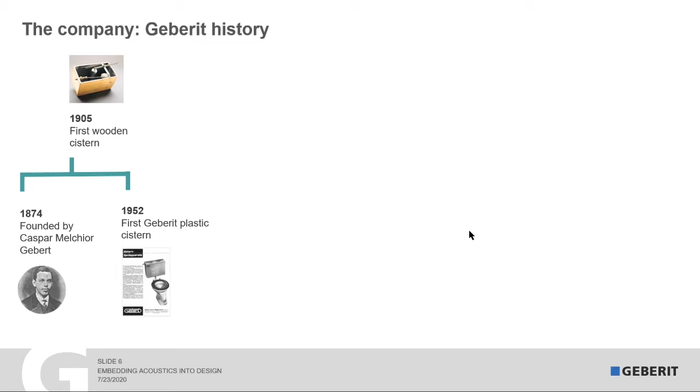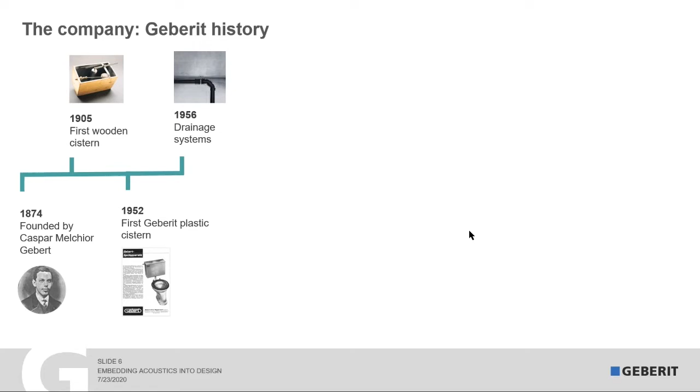Then a very important step in 1952 was when from wood it went to plastics, when plastics became the main material of Geberit, and cisterns have been produced with plastics. Then other product areas came into the picture, like in 1956 drainage solutions, then 1964 when the cistern solutions went into the wall. So the first concealed cistern is already more than 50 years old, from 1964.

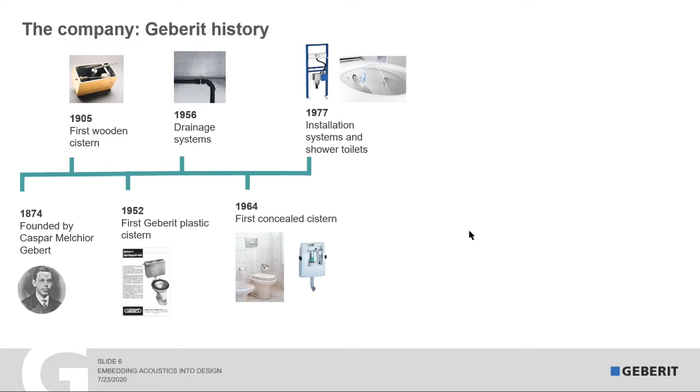Then everything, and this is something we will talk about today also a little bit, installation systems - not shower toilets, but installation systems. It will be a great contributor when it comes to acoustics when we talk about entire systems. We have water supply systems, and a specific water supply or supply system for industrial applications called Geberit Mapress. Most recently in 2015, Geberit did an acquisition and now also has products in front of the wall.

So basically, historically Geberit is very well known for its know-how behind the wall, and recently made the step out of the wall into the bathroom with bathroom ceramics.

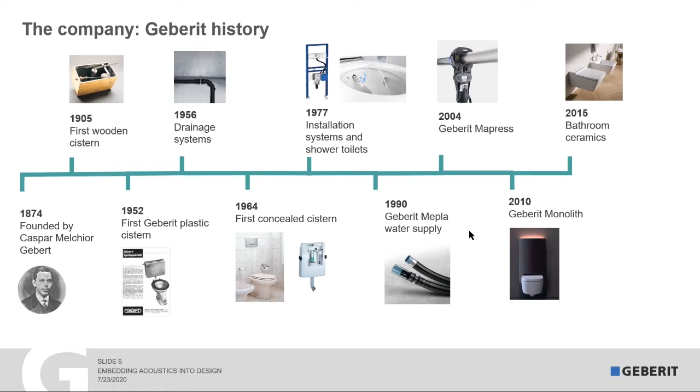We invest every year around 2.5% of our annual net sales into these different technology areas. In the first modules we have been talking about hydraulics and virtual engineering when we discussed drainage solutions or siphonic roof drainage systems, and today we're going to discuss more about sound insulation.

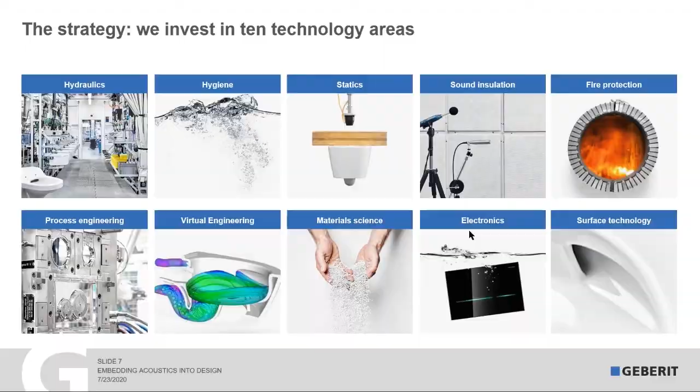When we talk about this technology area, it is important to know that Geberit has its own sound laboratory, which is unique in the industry. It's operational since 1997, and it's based next to our headquarters in Rapperswil, Switzerland.

Around 1,750 square meters, this sound lab is used to really test realistic sanitary installations and to measure the acoustics for different situations. So we are not only testing single products in this building, we really can set up complete installations over several floors and do testing accordingly.

So now let's discuss the main topic, which is noise today. So what is noise? Sound generally is seen as positive for primary use. For example, in cinemas, when we have conversations, when we're going to a concert, when we're listening to music, TV, etc. All this would be classed as positive sound to the people which are involved.

However, once the sound is escaping from the primary user's environment, it could be also classified as noise. For example, if in a household the TV is too loud and the sound escapes into the neighbor's living room, it could be classified as noise. So noise, if we talk about noise or sound, mainly we talk about unwanted sound.

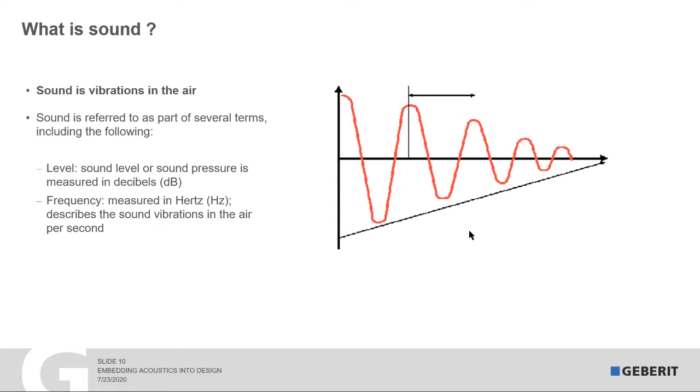In our context, it is usually described in two dimensions: first, sound as sound level or sound pressure, which is measured in decibel (dB), and also the frequency in hertz, which describes the sound vibrations in the air, or one cycle per second. So these are the two main parameters we use to describe sound or noise: decibel for sound pressure level, and hertz for frequency.

Now let's listen to the sound or frequency spectrum of different noise. This will be the next step. I'm already telling you what is coming next, but let's just have an ear on different hertz, on different frequencies we know.

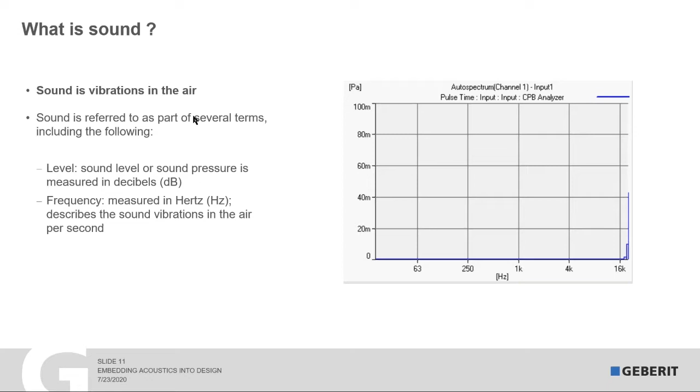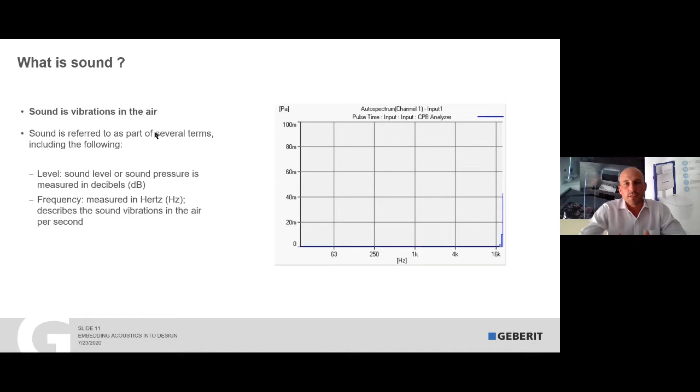So what we could see here on the graph, and also what you could hear, was the spectrum from 0 to 16 kilohertz on the same pressure level, and definitely it matters what kind of...

So we could list now the whole range of hertz which we as humans can hear, from 0 to 16 kilohertz. And in the second slide we could hear a bunch of different frequencies which come with a different sound.

What is the key here? We need to understand that every individual perceives or colorates different noise with his memories and his feelings. So when we talk about sound or noise, we need to consider psychoacoustics, which is a branch of psychophysics involving the scientific study of sound perception and audiology, and how humans perceive various sounds. At the end of the day, if we talk about acoustics in building design, psychoacoustics plays an important role, mainly in the individual assessment of unwanted noise.

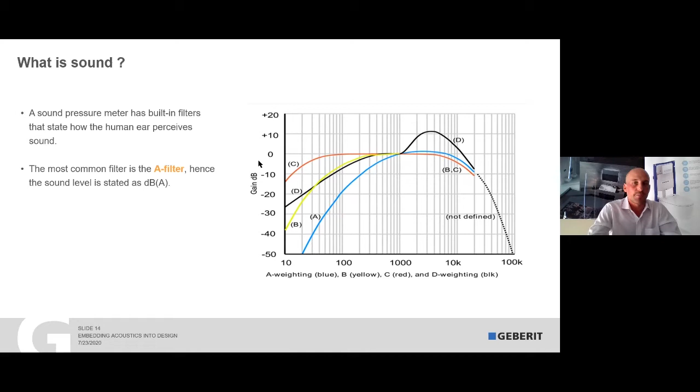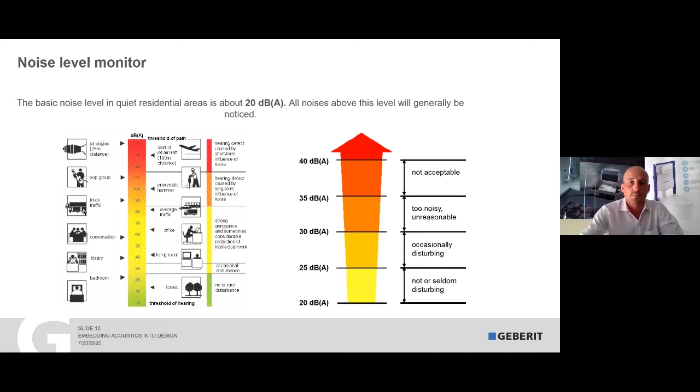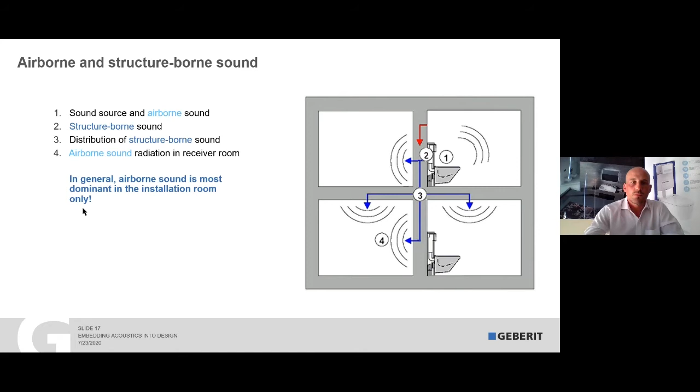I think that concludes this introduction about what is noise or what causes noise, and now why it is so important when we talk about acoustics in design.

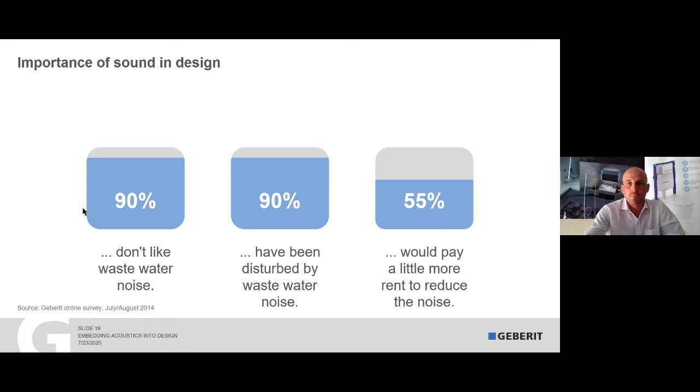But it really depends, and it depends on the volume of the sound, it depends really on the source and the type of the sound. Again, here the individual perception and the memories. And also it depends on what we associate with the sound we are hearing. So again, very relative.

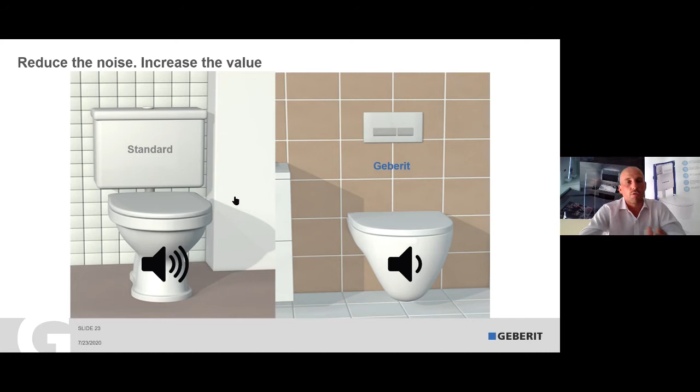So reduce the noise means also increase the value. It can definitely play an important role here, because flushing a toilet probably is not the most wanted noise we want to hear from our neighbors. So when it comes to Geberit, we can definitely give you some recommendations on what can be done to reduce the noise and to increase the value of the building, of the apartment, of the hotel room, whatsoever.

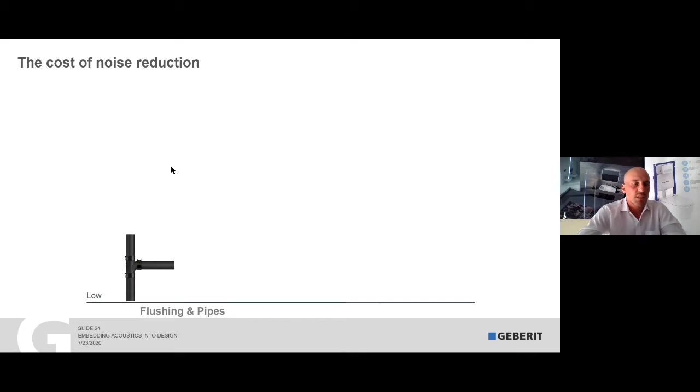If we have a look at the cost of noise reduction, I'm very brief. We can talk about materials, so using soundproof pipes and fittings, for example, or soundproof products. Let's say this is more of a moderate investment or a rather low investment. When we then talk about doors and windows, different quality, different type of glazing, the ceilings and so on, then the investment or the budget position will be

definitely on the higher side than when we talk only about pipes, for example. And then when it comes to really floors, walls, ceilings, the big surface within the buildings, then we talk of higher cost investments to reduce the noise.

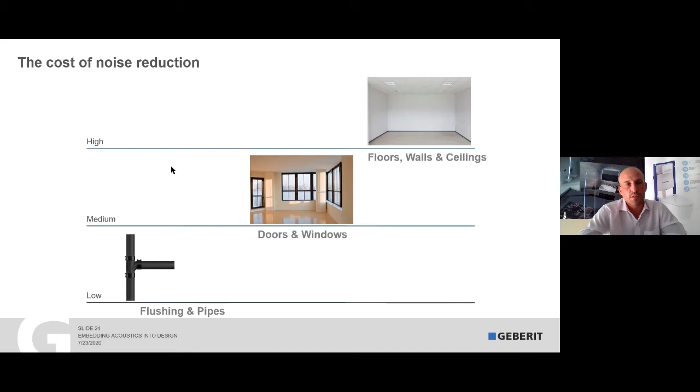But it's definitely essential to look into that topic from a holistic perspective. Just to replace a single pipe as our only measure against noise will not solve the general issue, because we will see later on that we really need to look into the complete build-up and the complete system which will be implemented in the building.

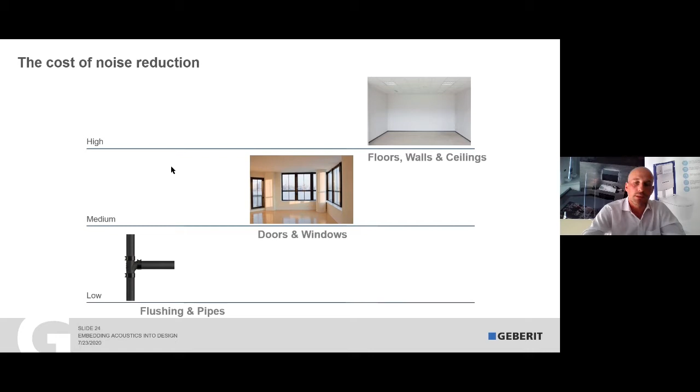And acoustic regulations, I think that's, from a Geberit perspective, the key or the most important fundament which needs to be in place to start talking about acoustics. If we don't have a clear standard, it will be difficult or impossible to classify or to measure and rate different noises.

So just a small study which I did, I found the green building regulation specifications, and now here when you talk about the UAE, we are referring to the British standard BS 8233 of 2014, which is a British standard document for guidance on sound insulation and noise reduction for buildings, but it's very vague regarding reducing sanitary noise in buildings, with the only reference being noise emission from hydraulic systems, including domestic hot and cold water services, refrigerant pipework, and soil and waste pipes serving other bedrooms is not to cause disturbance in normal use.

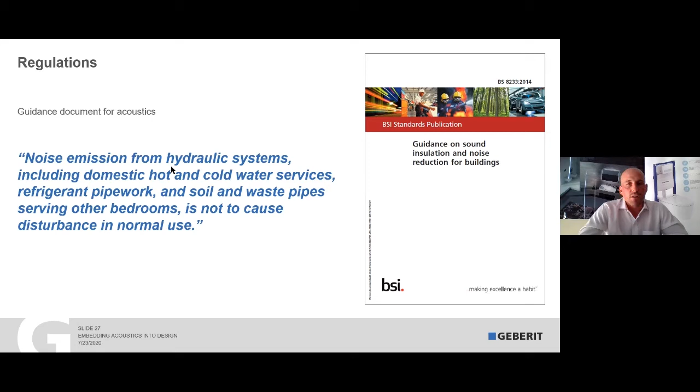So this kind of sentence is pretty vague. It's not really clear, and in general for steady external noise source, it is desirable that the internal ambient noise level does not exceed the guideline values in table 4. So there is a table. If you look at this table, it shows recommended noise levels for dwellings. The critical rooms have a suggested dB rating of 35 dB between 7 AM in the morning and 11 PM in the evening, with the bedroom having a recommended dB level of 30 dB between 11 PM and 7 AM.

Well, first of all, it's already good to define different areas within the building accordingly with their activity, to have different recommended noise levels. But when it comes to the terminology here, it's like desirable, recommended, and guidelines.

So meaning there are no requirements from this document to meet a relevant standard. It really would need to be clear what needs to be achieved, and then also what we need to look into. It needs to be defined how to measure.

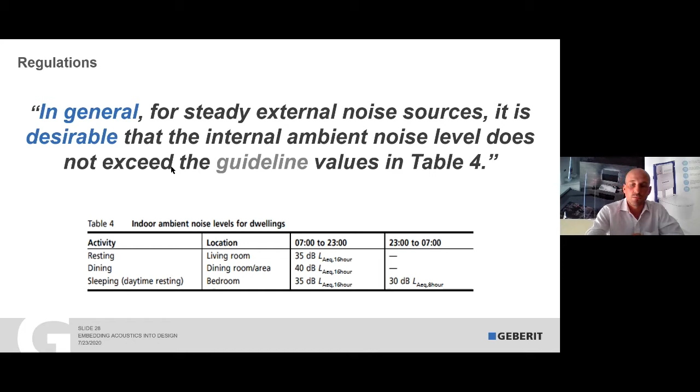So these guidelines are quite vague recommendations, and it goes further - there is building regulations Part E, which states that for soil stacks passing through noise sensitive rooms, bedrooms, lounges, wrapping with 25 mm of unfaced mineral wool within a plasterboard duct, 15 kg per square meter density, is deemed to be adequate. Again, this is very vague and gives no guidance on noise levels to work to, not to mention the use of any acoustically optimized products. It does not really describe how the acoustic regulations come across. So we need clear standards which are comprehensive, otherwise we do not know what to achieve and how to compare or classify in the end.

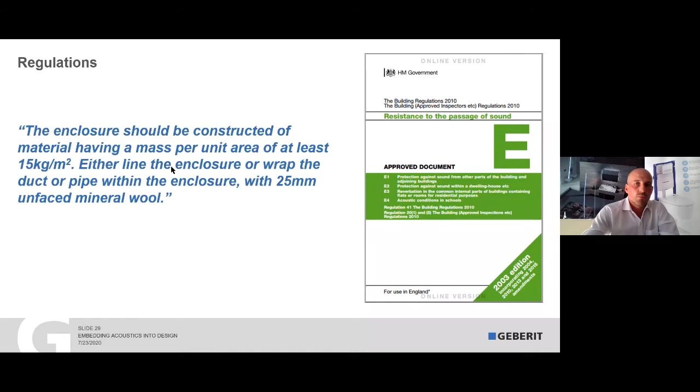So designing with acoustics in mind - it is mostly neglected in planning, concentrating more on the building materials and design of the building. And in the region, most installation elements have direct contact with walls and floors, like a floor standing toilet or a wall hung wash basin connected to the primary structure. Or if we look into the drainage system, we have cross floor installation, so all the pipes pass through the ceiling into the false ceiling of the room below, which is already a fundamental mistake if we want to achieve very high standards when it comes to acoustics.

So with the local pipe layout, we transfer already the sound with the pipe, but the source of the noise we transfer into another area, could be the neighbor's apartment, and then we are going to the shaft. So the key is to decouple as much as possible the source from the primary structure so that we can avoid the noise transmission into the building.

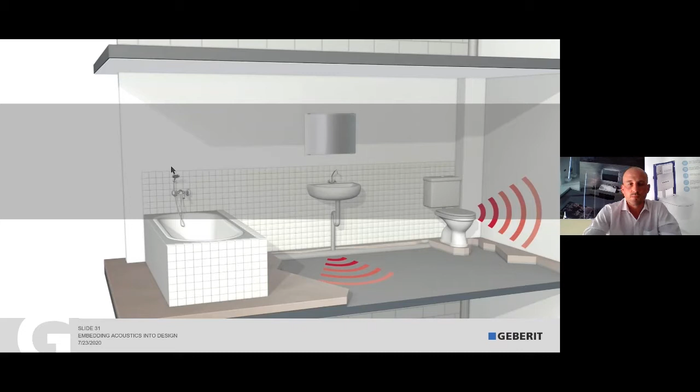So wastewater noise is neglected in planning. Generally, if we're talking about cross-floor installations, we shouldn't talk in the first second about acoustics. We should talk about how to plan the drainage system in a better way to avoid the problem.

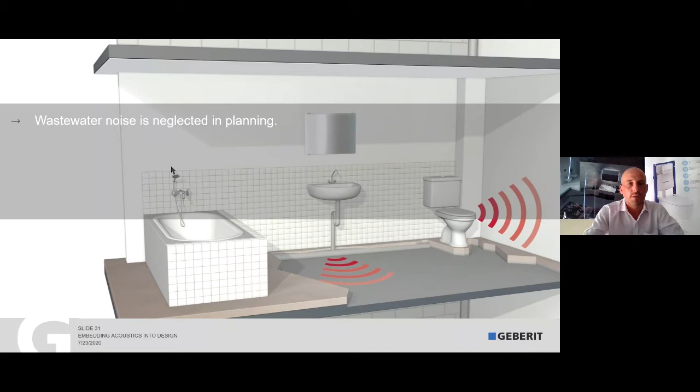Then installation elements with direct contact - this needs to be avoided. And some drainage pipes do not absorb the noise, so this is specific to, let's say, change a product that has been shown, take a better product instead of another one. Of course this is a solution, but we would recommend first let's have a look at the system before just the single product.

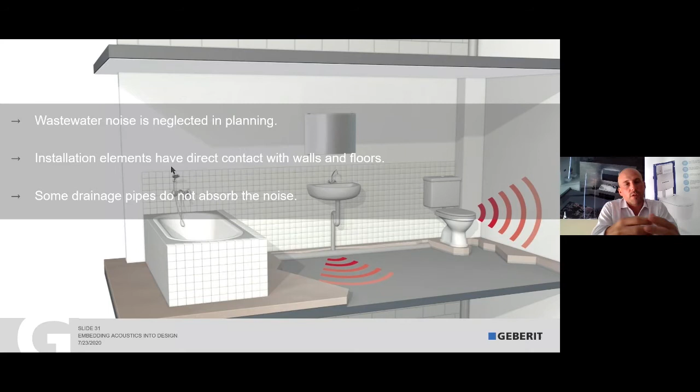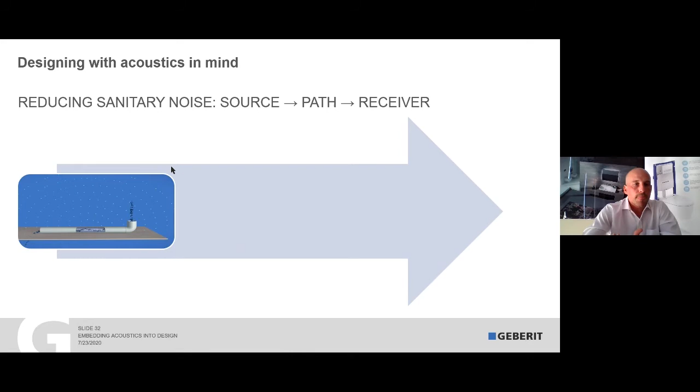So reducing sanitary noise, we need to look from the source and the path, and then in the end also where is the receiver. So really this is the key, to start with the source - what is the noise, where it comes from, how it's transferred within the building, and where are the receivers. This needs to be in our mind.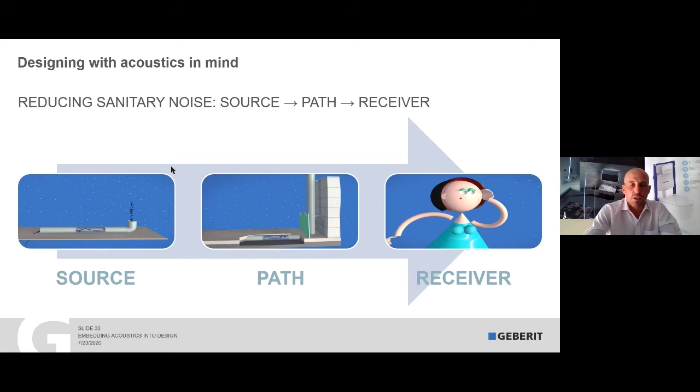This starts from the floor layout, and this is, let's say, without any cost. If we are planning the layout, we can amend the location of the bathrooms without any cost. The next step is then what we have seen - we can go into spending money on more materials, etc.

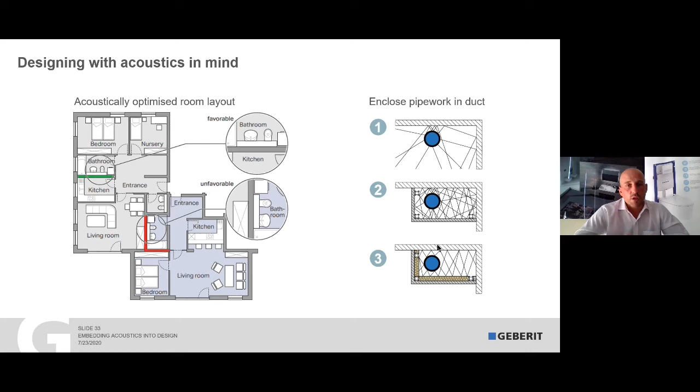So definitely, look into the design from scratch.

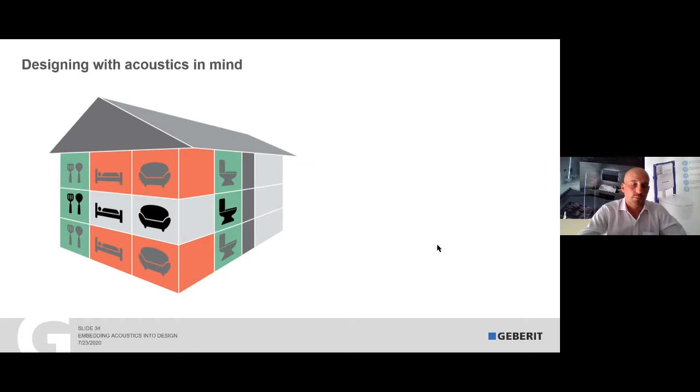Furthermore, here we see the building from a sectional or 3D perspective as well, when it comes to the planning, that we are really trying to plan the bathrooms or critical rooms where we have the sound source above each other and next to non-critical areas. Then we already avoid lots of discussions further on.

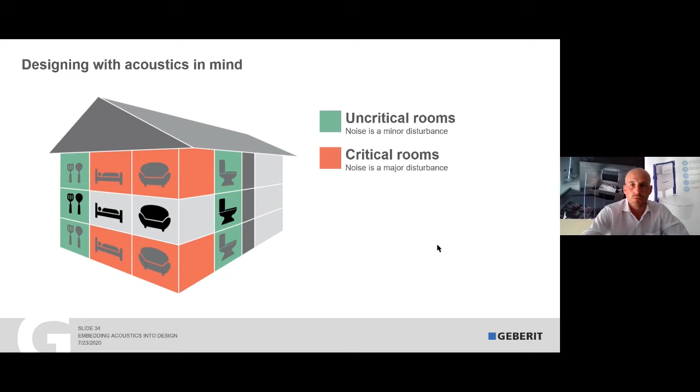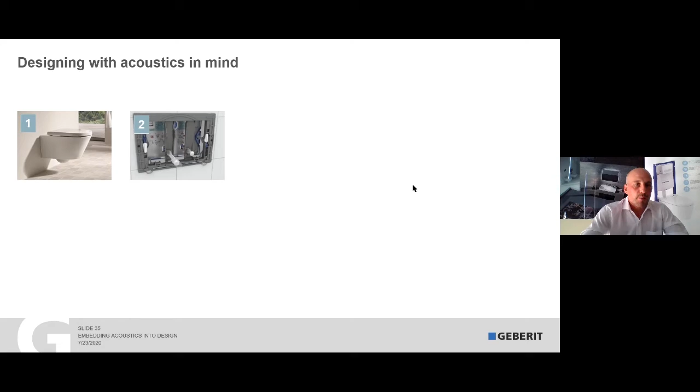These are now some examples of different Geberit products which help design with acoustics in mind, with having, instead of a floor standing toilet, a wall hung toilet with the system behind, which can be decoupled from the primary structure, but only when I'm really planning my wall accordingly.

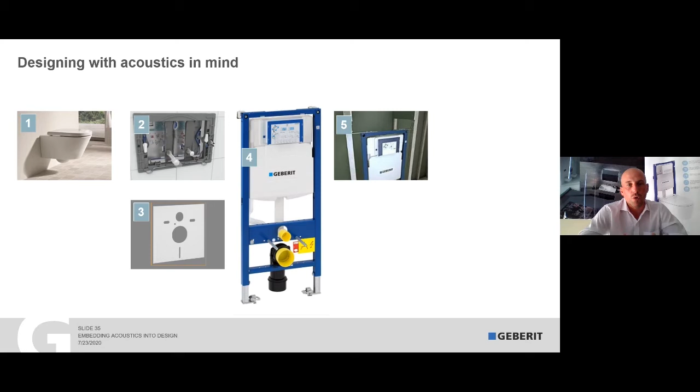Also, if I'm putting a concealed system into a brick wall or a solid wall, then at the same time this will transmit sound like a floor standing WC. So there are a lot of possibilities from a product level perspective, but this will not be the problem solver. We need to go one step further.

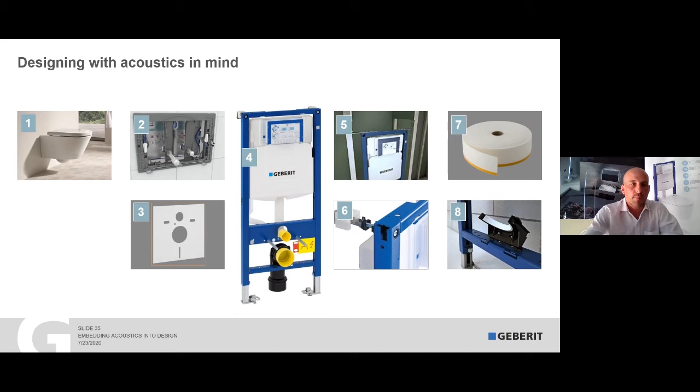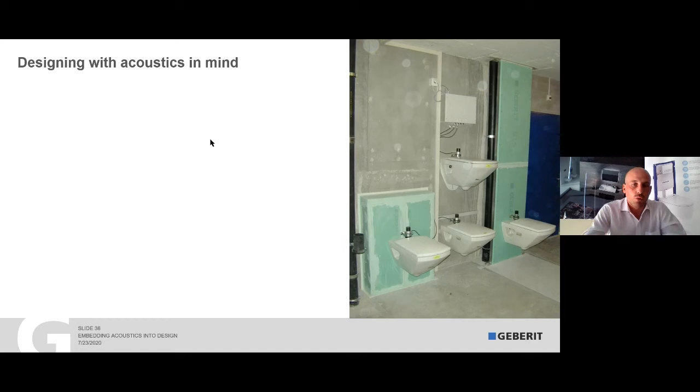So here, definitely, I have good actions I can implement to reduce the problem, which is known practice. But then the execution is very critical.

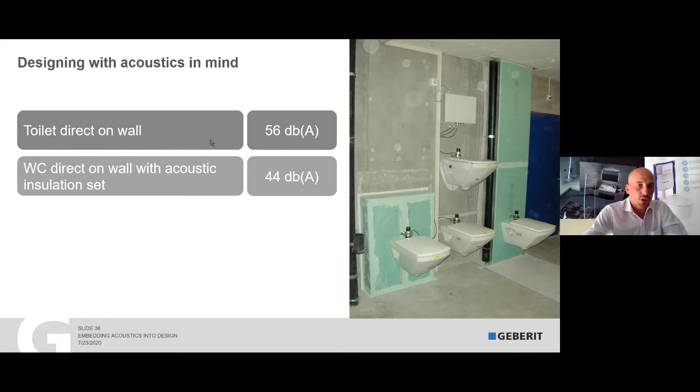So a toilet, for example, direct on a wall will give you, let's say, 56 dBA. A WC direct on the wall with the acoustic insulation set gives 44 dBA. So only that small insulation set, which we have seen, can reduce it. And then a toilet mounted on a Duofix system, a comprehensive installation system fully decoupled from the primary structure, will result in 30 dBA, which you see here on the right hand side.

These measurements, what we do in our laboratory in Switzerland, are according to Swiss standards. So we measure in the room diagonal below. Here these toilets are on the first floor, and the measuring area where these values come from is one floor below and diagonal on the opposite side of these WCs, just to clarify that.

But you see here, we were talking in the beginning about 30 dBA, and you see here now already, to achieve that, we need to have a fully decoupled drywall system with an integrated flush tank and a wall hung WC to achieve this kind of levels. So you can see that it is quite some planning and effort behind achieving levels of around 30 dBA.

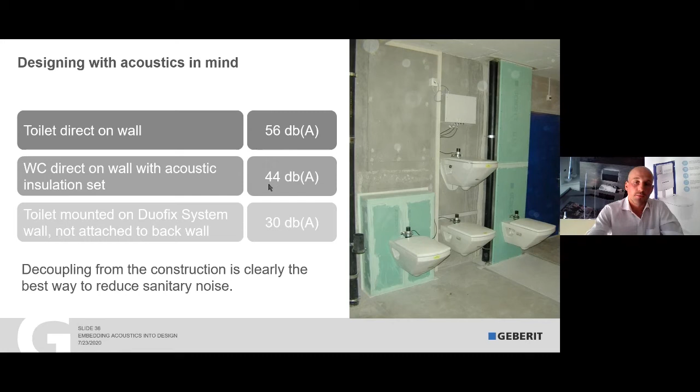Another factor here we see is about the pipes as well. As mentioned, there are different materials on the market. Geberit has a piping system called Geberit Silent DB20, which is a reinforced polyethylene with more dense, thicker walled material. It's a mix with 20% barium sulfate, and it comes with acoustic brackets, because this is also very important for how we fix the pipes to the wall.

If you have the best, the most expensive pipe system, but you're not going to install it the right way, if you create some direct contact with your structure, then all this effort is gone.

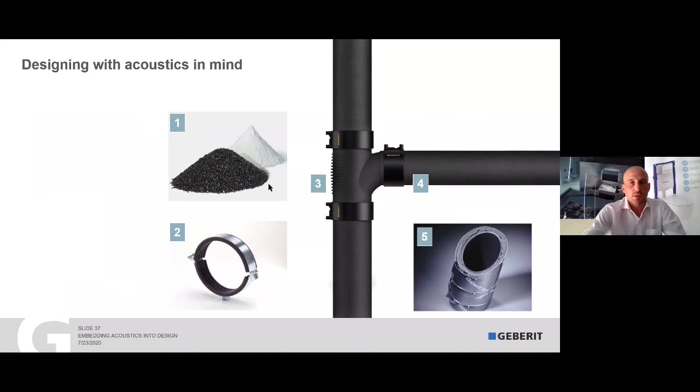Additionally, you can put insulation if you are in a critical area. But I think the key message from Geberit when it comes to acoustics is that the best solution is to have a pre-wall with acoustic decoupling, which stops noise from traveling in the wall. You have your primary structure with the solid, weight-bearing walls, and then in front of that you build a drywall solution which can be decoupled with insulation around the structure. Then the piping system needs to be decoupled. You need the right brackets properly installed, with no contact to the walls, to avoid transmission. It's about decoupling, using stud work and even foam pads between the studs and the floor.

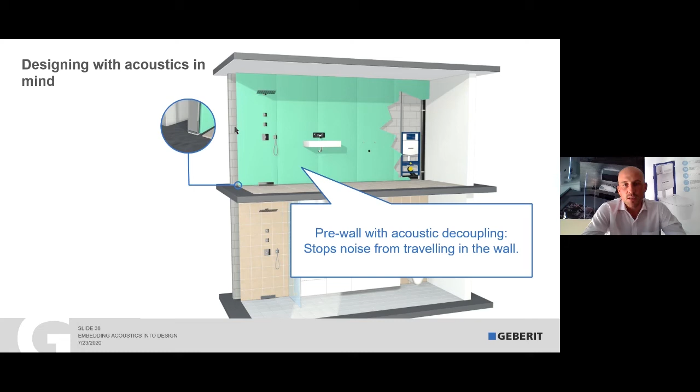The wall-hung toilet, as mentioned, will stop the noise from traveling to the floor. If this is connected to the system, we can also avoid the noise here. First we have the flushing of the toilet, then the water goes through the pipelines down the building, the seat and cover, and then the filling of the system again. So different noise sources can be much better decoupled from the structure with an entire solution.

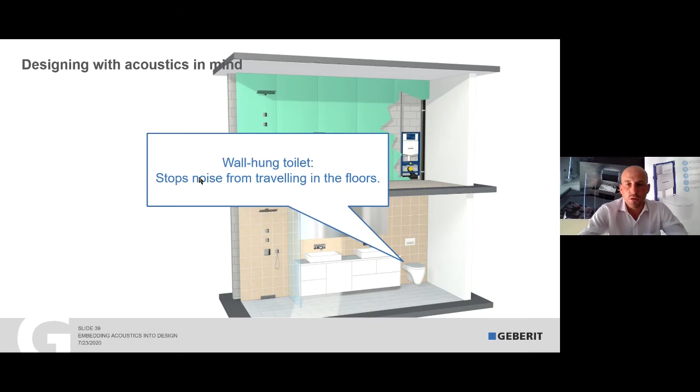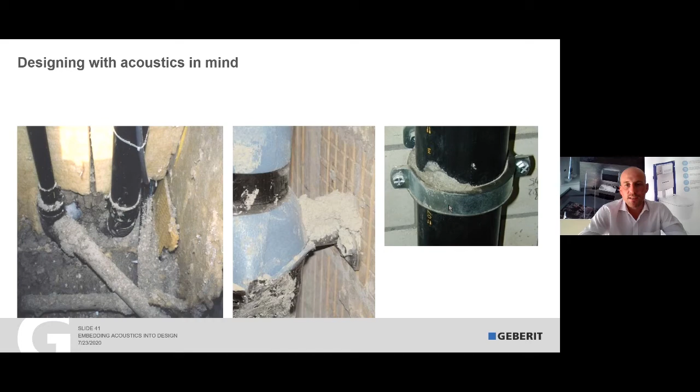As mentioned, the piping needs the right brackets. When it comes to practical execution, this is what we often see on sites - even with the best materials, additional insulation, and good acoustic brackets, if there is not a proper execution, it's a lost investment, because the sound will travel over the cement and create so-called sound bridges. Or here, if there's transmission through the ceilings without proper insulation around the pipe - which should separate the primary construction from the technical installation - then it's not worth having higher grade acoustic products. The cement reduces the effect of the rubber in the bracket. It's essential that the installation is installed in an acoustically optimized way.

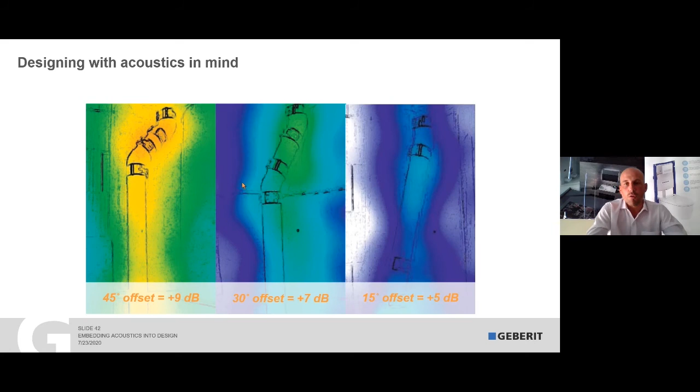Switzerland, home of Geberit, the European market leader in sanitary technology, and home of a world-famous musical instrument, the Alphorn.

Sounds great, doesn't it?

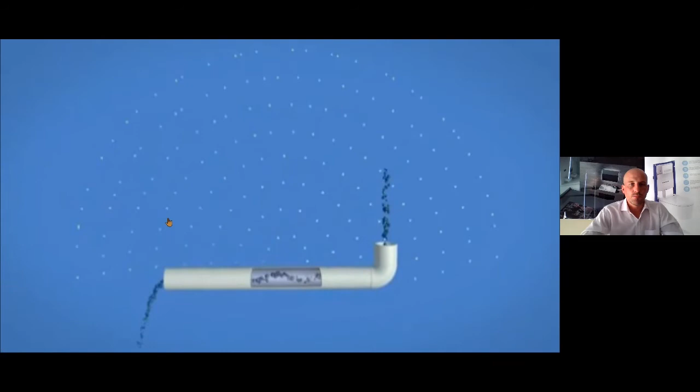So what's the difference between a good sound and a bad noise? Well, it's complicated. The quality and volume of the sound are important factors, of course. Another key factor is location. Something that sounds great in the Swiss mountains can be very annoying in your bedroom. Fortunately, most people don't have Alphorn players for neighbors, but still, the problem is familiar to many of us. While it's unlikely to be an Alphorn, it could well be a drainage pipe. The sound is completely different, but both the Alphorn and the drainage pipe follow the same acoustic principles. It's all about vibrations. The water makes the drainage pipe vibrate. The vibrations are transferred to the air around the pipe, but also to any material that touches the pipe. The waves travel within the building, not just through the air but through floors and walls too, which means there's a good chance the waves will reach your ear or your neighbor's ear. The ear sends a signal to the brain, which turns the vibrations into sound or into noise. You could say our homes are full of Alphorns, with one big difference - the sound of a drainage pipe is far more annoying.

No one likes the sound of a toilet. But how can we reduce the noise made by sanitary installations? Geberit has 3 good answers to that question. And the great news is, compared to other building costs, these solutions are very inexpensive.

Solution number 1 is easy. When planning the house, do consider people and noises. For instance, avoid building a bathroom right above a bedroom if you can. And if it can't be avoided, plan for extra noise insulation.

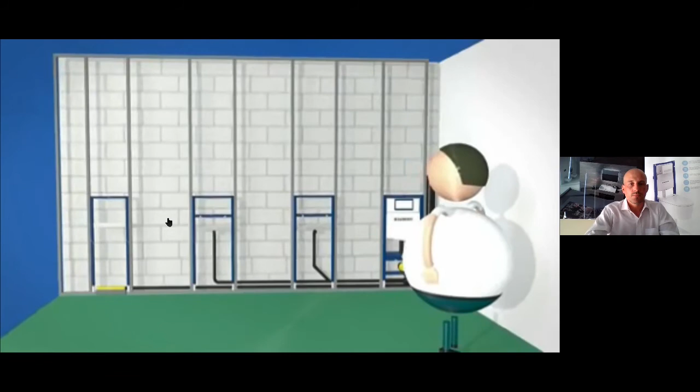Solution number 2 goes one step further and is extremely effective: minimize the vibrations by detaching the sanitary installations from the building. Here's what you should do. Place the entire flushing and drainage system behind a pre-wall, and make sure the pre-wall, cistern and pipes have no direct contact with the building. Using a pre-wall also ensures that the drainage pipes are on the same floor.

Don't place the toilet on the floor. Install a modern wall-hung toilet. Again, there's good news: Geberit can provide all the products and know-how you need.

Finally, solution number 3: choose the silent drainage pipes from Geberit. In combination with a state-of-the-art pre-wall installation, Geberit pipes lead to excellent noise reduction.

No wonder, in the heart of Switzerland, Geberit runs its own sound lab. As a matter of fact, no one knows more about sanitary noise reduction than Geberit. By the way, Geberit is more than happy to share this expertise with you. So if you're dreaming of peace and quiet at home, ask Geberit.

I think this movie summarized the whole presentation very well. So really the key is to decouple and think in the entire system, first of all, and it starts from planning the building.

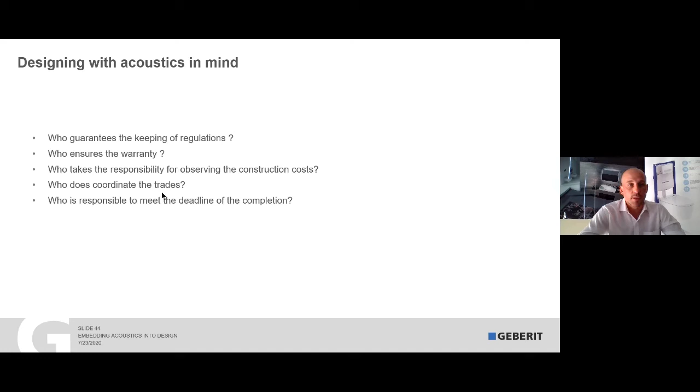The system approach is also interesting if you look at the trades involved. Like in traditional building, when it comes to the bathroom, we have the plumber, solid wall builder, plasterer, tiler, and again the plumber in the end, who comes to install the bathroom products. So this project needs a lot of coordination.

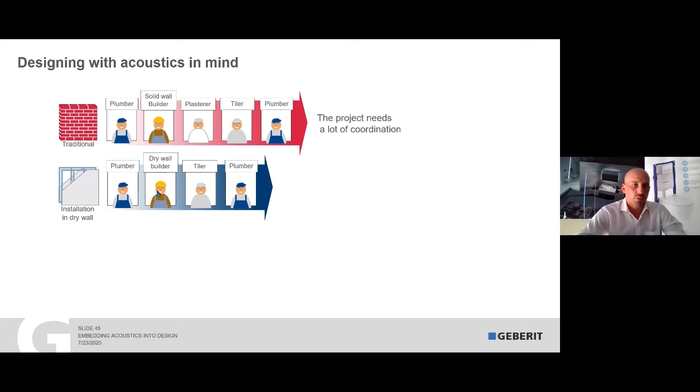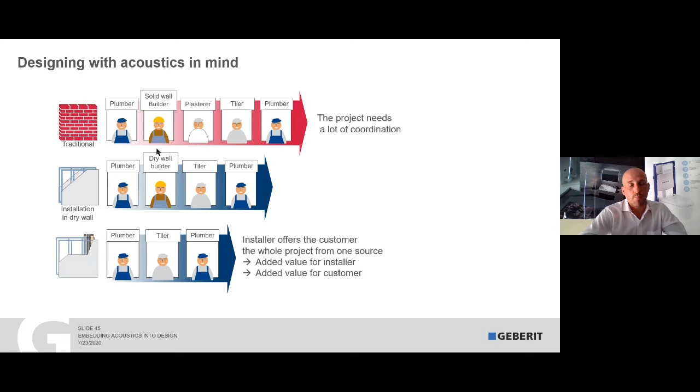When we have a drywall installation, then we already can reduce one trade. And when we offer a complete solution out of one hand, let's say a sanitary full system solution, then we can even reduce the trades on site, and everything comes from one source. This will be added value at the end for the customer, because the result can then be really on a much higher level in terms of quality and acoustics.

Last subject is about acoustic data. There's a lot of acoustic data available on the market, provided by different manufacturers, and we would like to explain how Geberit approaches or handles this kind of topic.

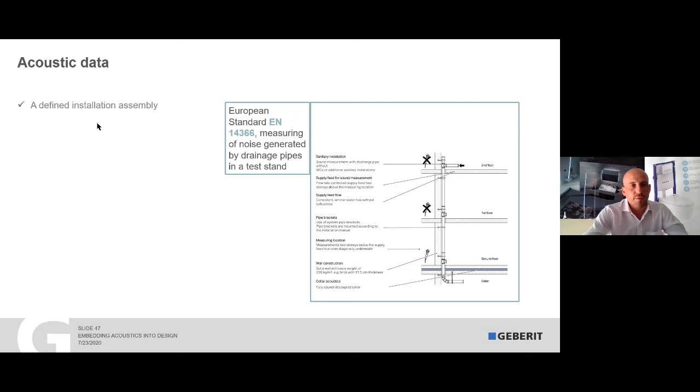There is a standard, the European standard EN 14366, which measures noise generated by drainage pipes in a test stand. This standard measures laminar flow, not toilet flushing, excluding filling noise and water flow. So it's really a defined installation assembly. The standard clearly tells you, what you also can see here in the picture, what needs to be installed.

It can be used to compare different drainage materials, yes, and it's more stringent than previous test standards, yes, but it excludes the filling noise and the water flow within the building, so it's not really a real situation that is tested. It also gives no real strict rules on how to fix the pipes, and it doesn't come with a realistic room layout.

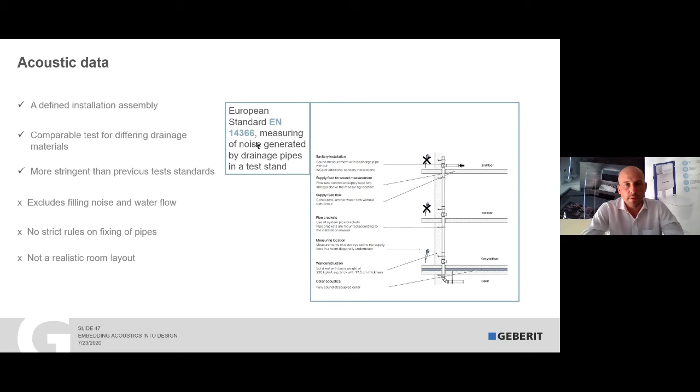What you can see here, for example, is that you measure with the microphone two floors below. Basically you build up this pipe installation, and first you put in water in a laminar flow, so just a small amount of water. If you flush a toilet, it will be a completely different scenario, and also we need to see what we've seen before: is it really relevant to only measure two floors below? Maybe not.

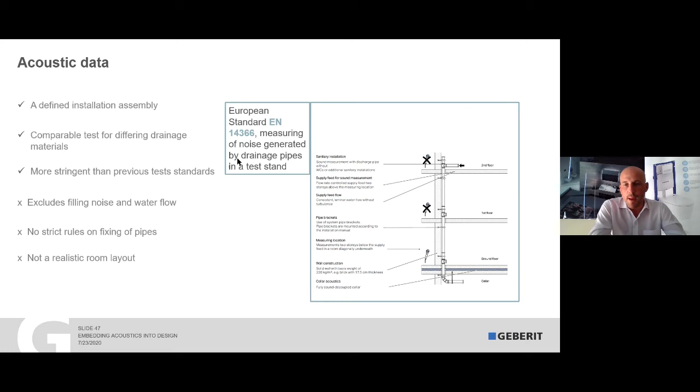Actual noise levels are also dependent on the ambient noise levels. This test setup is just questionable, and we believe it's not a real setup like we find it in our buildings.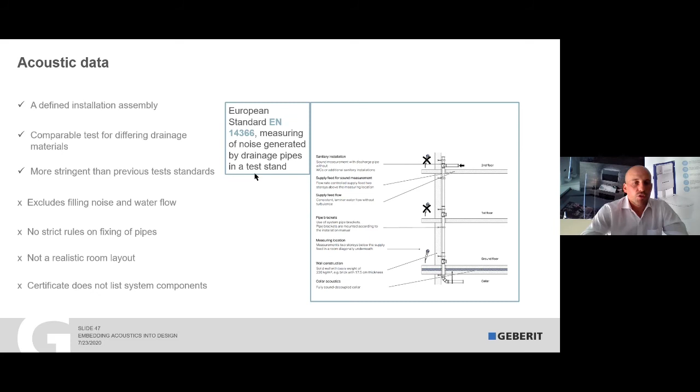So it's really a certificate which is not comprising the full system. What Geberit is doing, and we believe that is a much better approach when it comes to testing of acoustics, especially for drainage systems, is that we need to look into the whole system. Here on the schematic we see we really have a full build-up with fixtures, water supply pipes, and most importantly we're going to measure in the room next door or diagonal below.

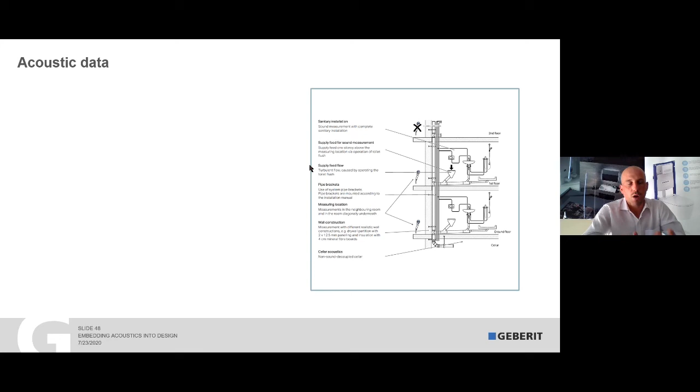And we give also clear specification on what kind of wall construction we are using, what pipe brackets, the pipe brackets installed as per technical applications. This needs to be defined, because if you want to have values on acoustics, then you really need to test a real build-up, how it then will be or look like in the end on the building.

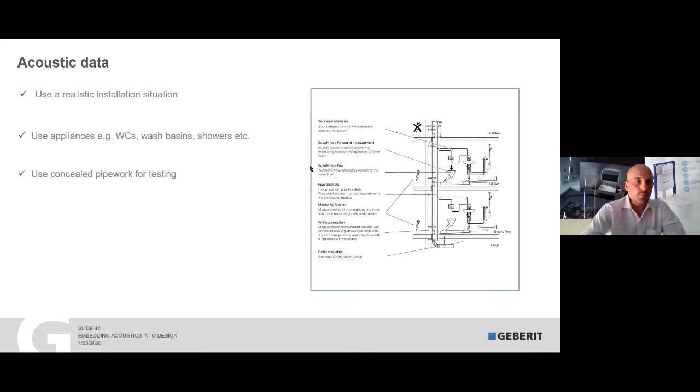So use a realistic installation situation, really the usage of fixtures like WCs, wash basins, showers. This will generate the real noise out from the source, and the whole pipe work needs to be installed as it would be on the site, and it needs to be recorded from behind, below, and diagonally. That will really give you the real figures.

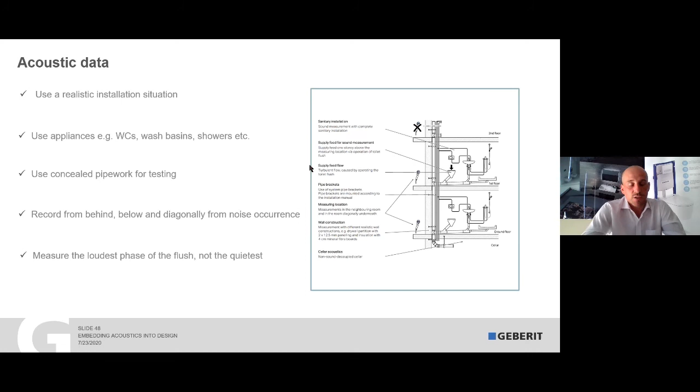And also measure the loudest phase of the flush, not only the quietest. Compared to the European standard, I think this setup will give you much more realistic results, or it will give you the realistic results. So therefore, Geberit provides acoustic data.

We have a brochure called Sound Insulation, and on our website international.geberit.com you will find it, and we publish these acoustic data from real build-ups, real situations - different build-ups which we then define on our data sheets with all the parameters involved, from the density of the wall, the type of installation, whether it's a pre-wall, how the pipe work is installed, and so on.

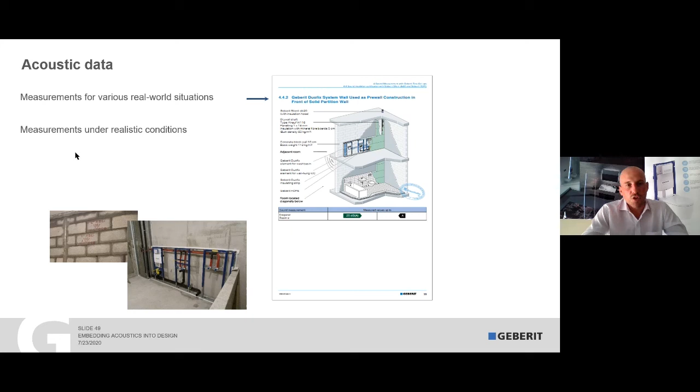This is really measured under realistic conditions, described on the fact sheets, and then certified by the renowned Fraunhofer Institute. We give you values of what you can really achieve with this type of build-up. Then we discuss a complete system, a complete solution, comprehensive, with values which really can also be achieved.

And we will provide detailed results to these fact sheets.

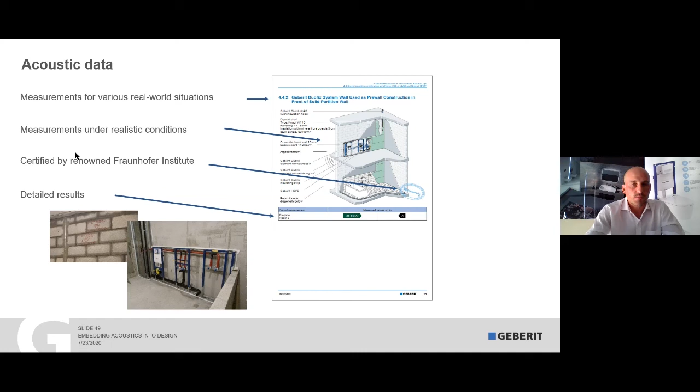So as a summary: we all perceive sound in a different way, that is definitely the case. 90% of people do not like wastewater noise, or bathrooms in general. Design with acoustics in mind from the outset, really from the beginning - that's the most effective. Then regulations and standards need to be very clear, otherwise it will not be possible to discuss or define, classify what we really want to achieve. Not possible without regulations. Respect the different room types.

Think about the source first of all, then the path and the receiver. Ensure good installation practice - this will be the key on all of your projects. If there is not good installation practice, the best materials will not help. And ensure that the tests are relevant and really realistic. There is a lot of data, but out of the context of a real installation.